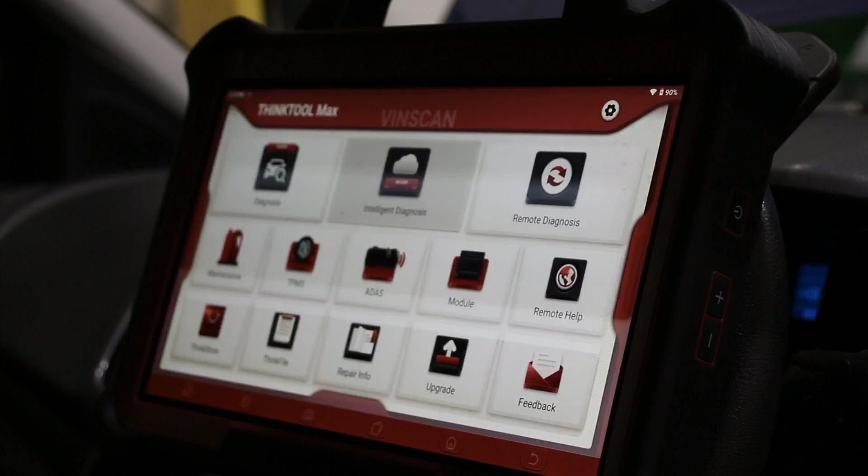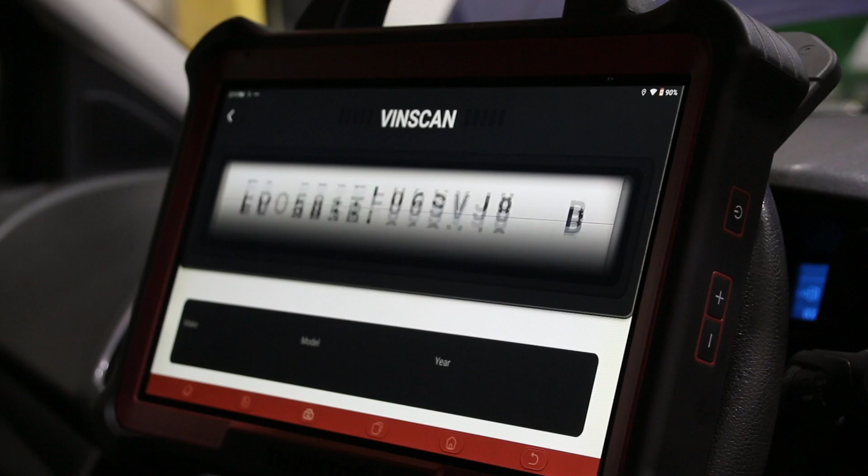So first of all, let's confirm the customer complaint. So we've got the diagnostic tool hooked up. We'll turn the ignition on and we'll scan the car. It'll auto ID this van by VIN number. There we go. And there we have the topology of the car. So we do a smart scan. Got a medium speed network and a high speed network on this vehicle. The ABS and the body control and the powertrain control module are all on the high speed CAN.

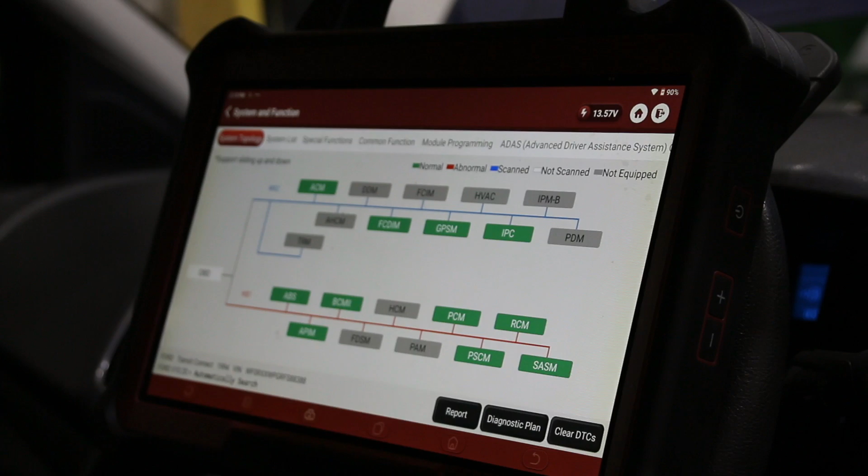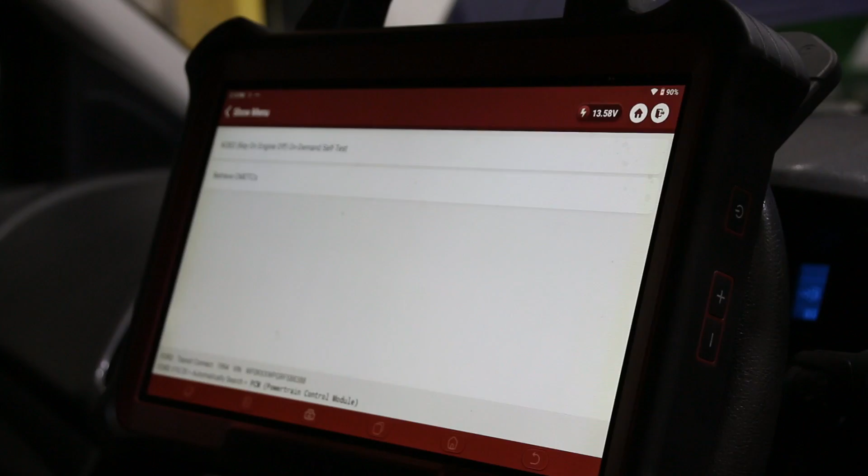On the medium speed will be infotainment, etc. Aircon. Once again, if it shows in green, it's normal. If it shows in red, it's abnormal. If it shows in grey, that module is not fitted. So no faults anywhere in the vehicle. We're going to go straight to the PCM. See, we've already seen there were no faults in it. I'll just prove to you. No DTCs.

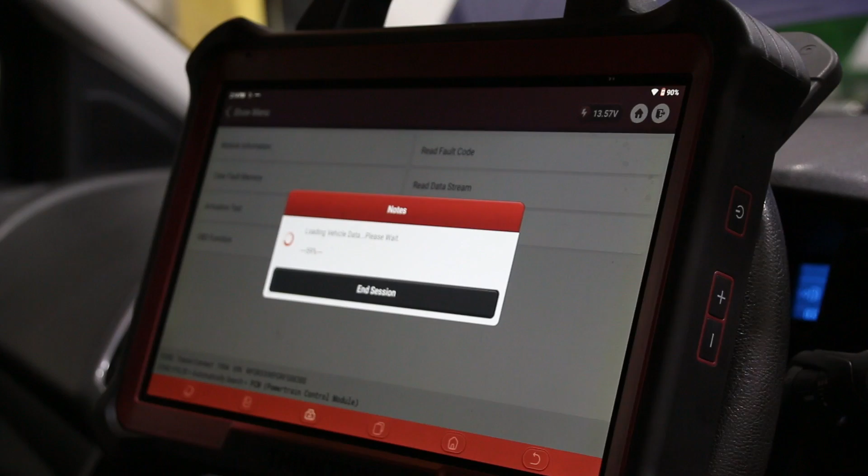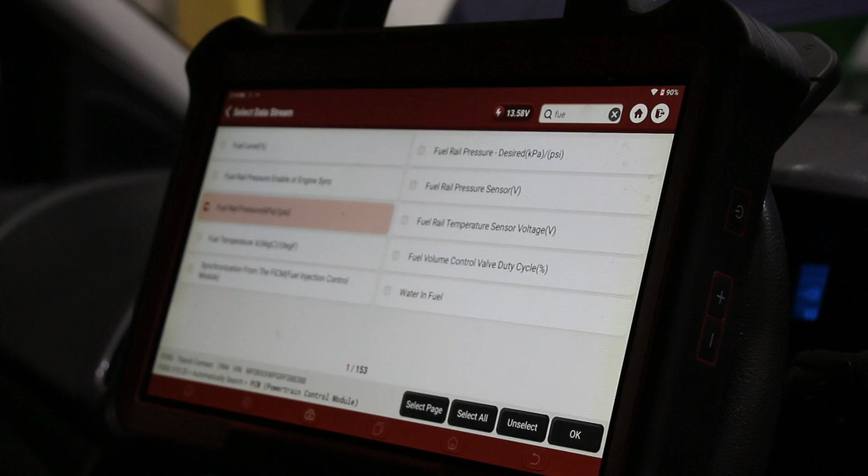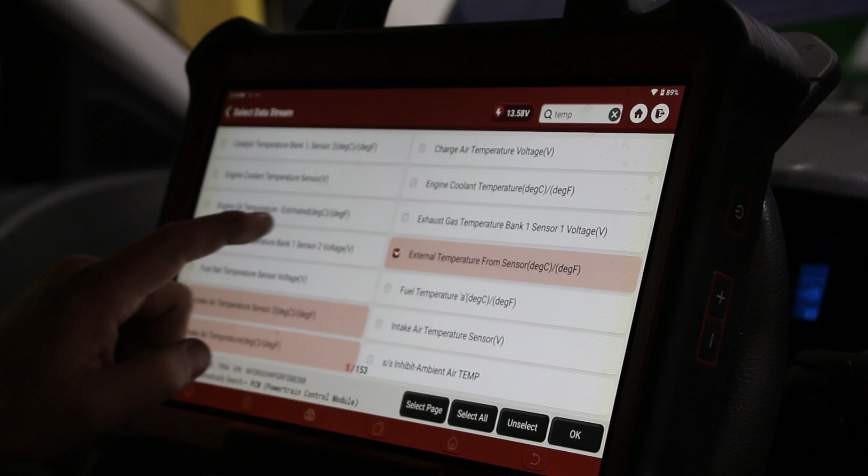We'll go for data. Now with any poor starting vehicle, the first thing I would look at is, does it have fuel pressure? So fuel rail pressure, kPa. Also we'll look for temperatures. So we want the ambient air temperature. We want the air charge temperature. Don't need the catalyst temperature. External temperature. Intake air temp 2. Intake air temp 1. And we're looking for coolant temp as well.

So the air charge temperature is 13 degrees, the ambient air temperature is 12 degrees, the engine coolant temperature is 12 degrees, the external temperature is 12 degrees, which is the same as the ambient. Intake air temperature 2, which is part of the boost pressure sensor, is 13-14 degrees, and the intake air temperature 1, which is part of the mass airflow sensor, is 19 degrees. So could that be where our fault lies?

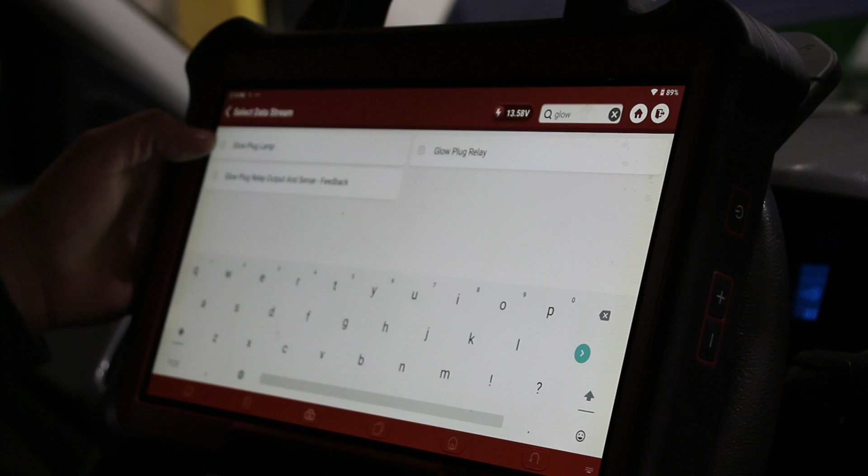I'm now going to also put on the glow plugs. So glow plug, all the glow plug data. At the minute the glow plugs are off, cycle ignition, they stay off. When we crank it, do they stay on? And at this point here, we're going to prove the customer complaint. Glow plugs are coming on, vehicle's still not starting. Try to start there. As you can see, an extended crank time.

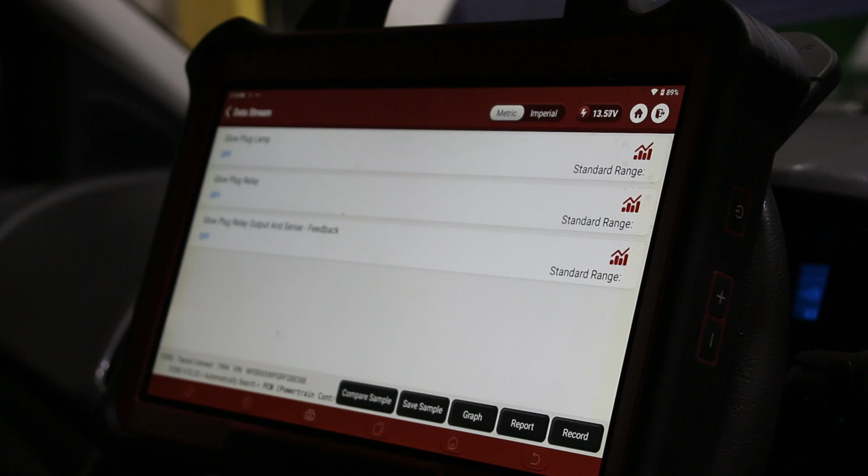Glow plugs were on, but what did we find before was this intake air temperature is sitting higher, considerably higher than the rest of the temps. It's quite cold in here today, so the ambient air temperature 12 degrees, which is probably about right, so we'll use that as a datum. And then every other temperature, the coolant, the air charge temperature, all there or thereabouts. But the intake air temperature in the airflow meter is sitting at 19 degrees. So straight away, we can see there's a possible anomaly there.

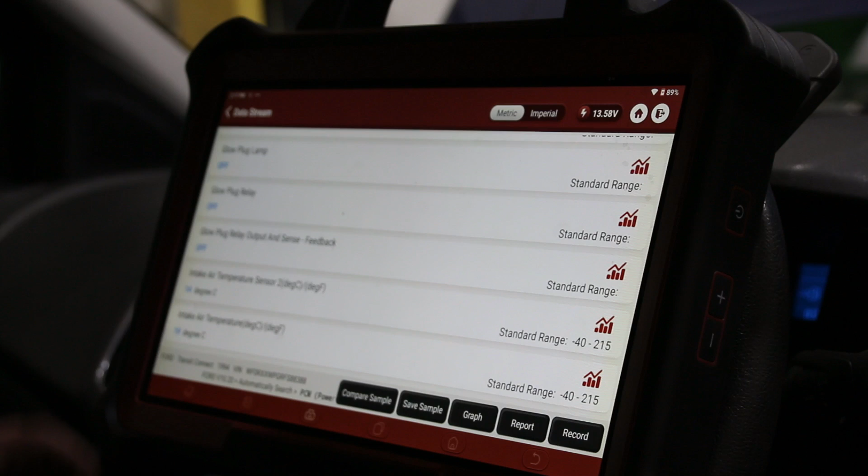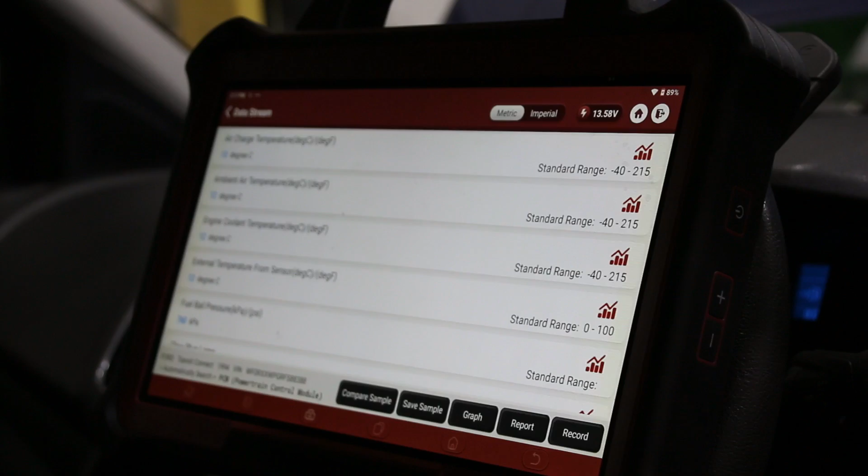Now this vehicle, I'm being told, has had a mass airflow sensor fitted, and the temp sensor is part of the mass airflow sensor. So let's go to the airflow meter, let's take a look at the temp sensor and see if we can bypass that and bring that down to a temperature which comes in line with the ambient air temperature in the workshop today. So we're in under the bonnet. As you can see, the intake air temperature is sitting at 20 degrees there now.

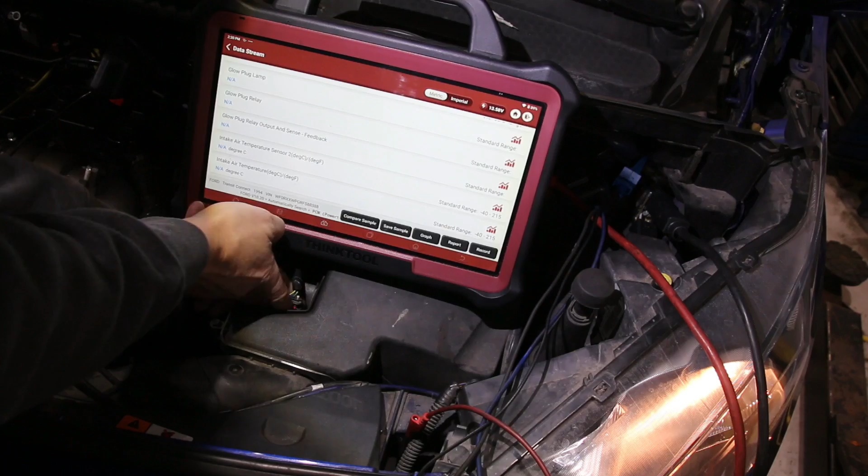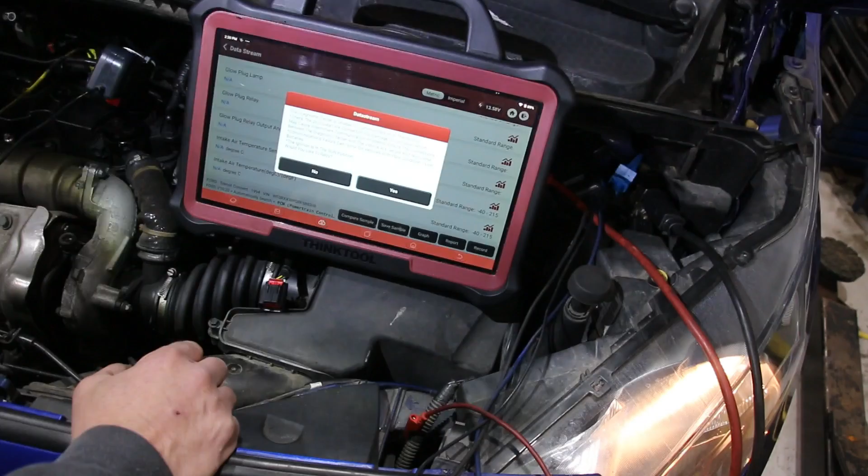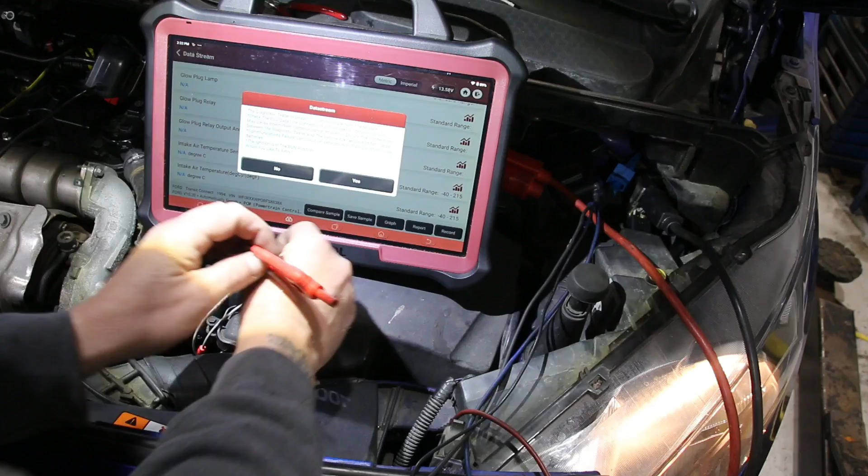So I'm just going to unplug the airflow meter. And what I'm going to do is, I want the airflow meter to still register airflow, but what I want to do is take the intake air temperature sensor out of the circuit. So to do that, I'm going to use these things, breakout leads. One by one, we're going to break into the circuit. So that pin there goes to that pin there. The next one, pin 2, goes to pin 2 on the plug.

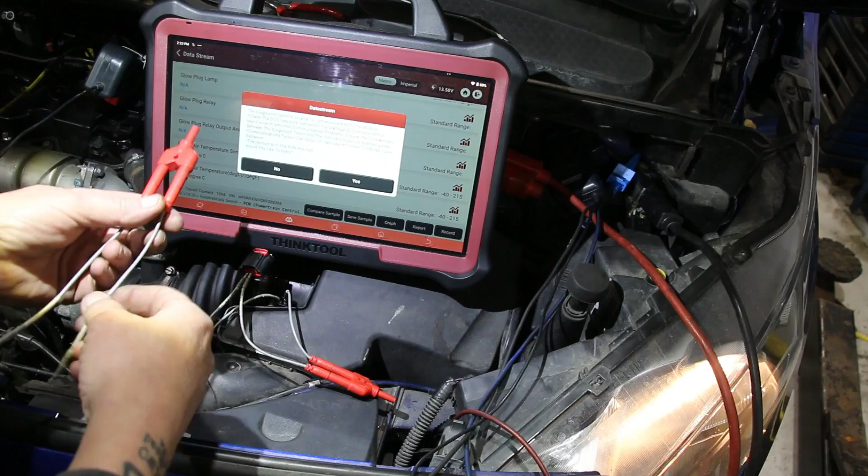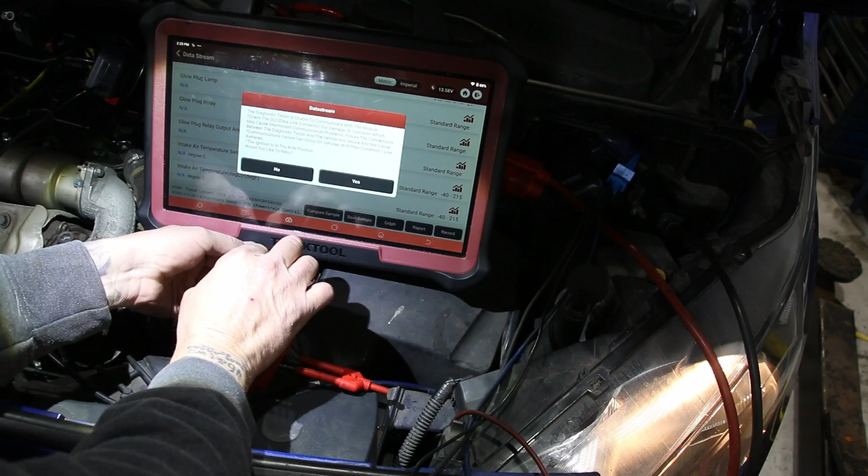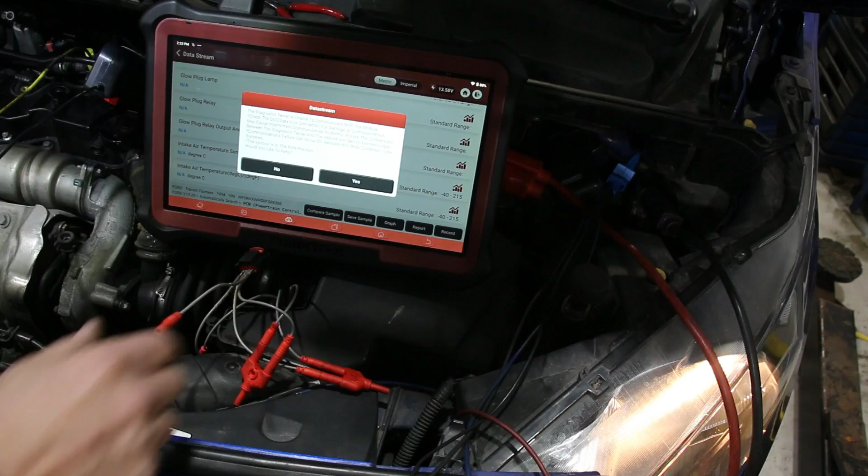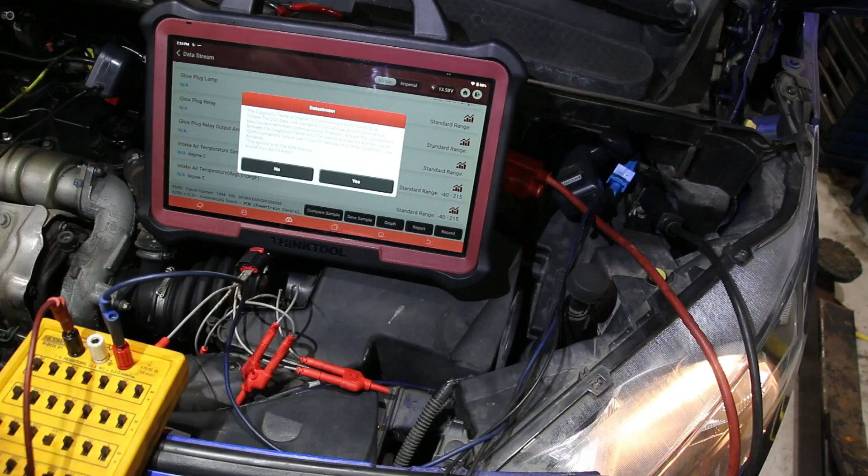I've already checked the wiring diagram for this, and I know that it's the pin to the far right, which is the temperature sensor circuit. So what I'm doing here is I'm keeping the airflow meter in circuit. I'm going to take the temp sensor out of circuit, and I'm going to replace that with a decade box. Got the decade box here. Basically what a decade box is, box full of resistance. So we use this because a temp sensor circuit is just a resistor which is variable depending on temperature. We replace the temp sensor with the decade box, and then we can control the temperature that the ECU sees.

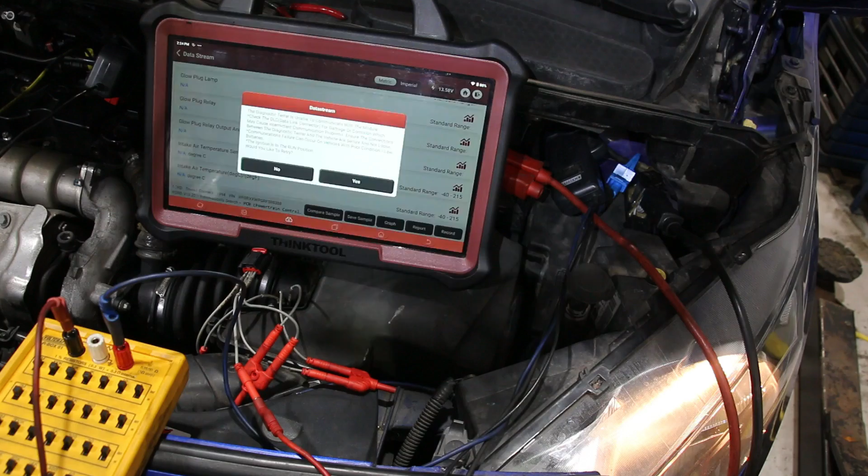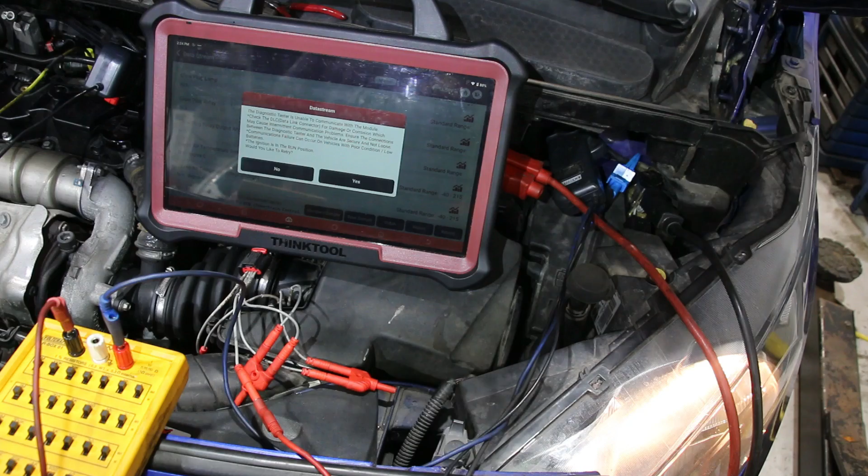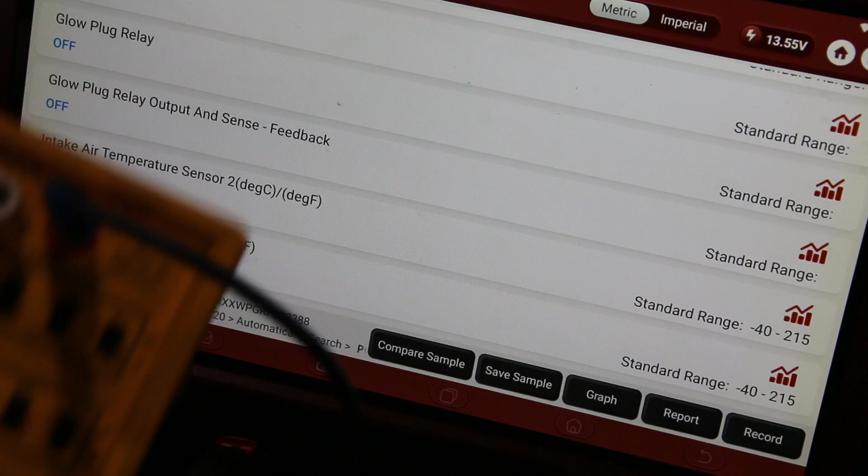So I'm now going to turn the ignition back on, and we'll see on screen as I start changing resistance in the circuit, the temperature on the intake air temperature sensor circuit will start to change. So I'm going to zoom you in on the temperature. Now, as you can see there, it's now sitting at 143 degrees because I've got it out of the circuit. But as I start flicking switches, you'll see that's starting to change. So there, 81 degrees. So that's with 300 ohms of resistance in the circuit. 3 kilo ohms gives me 14 degrees. We're getting somewhere close.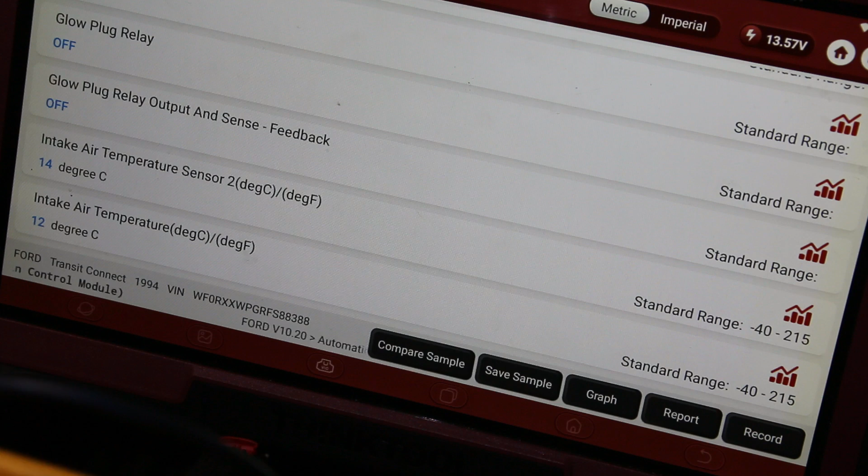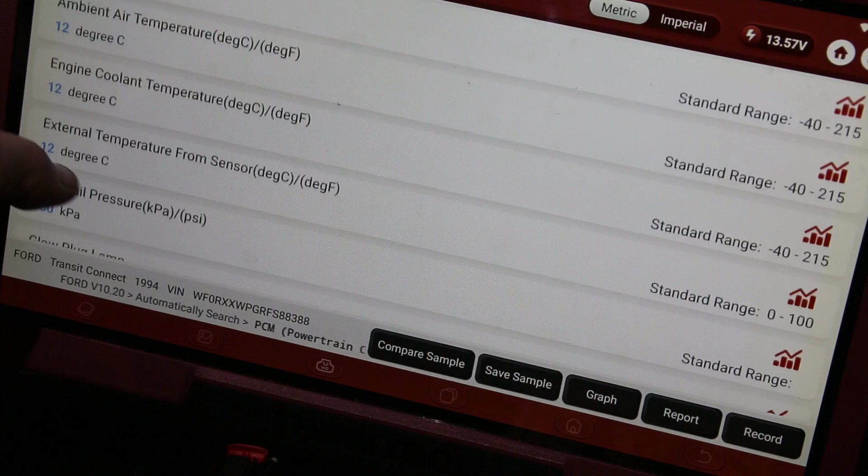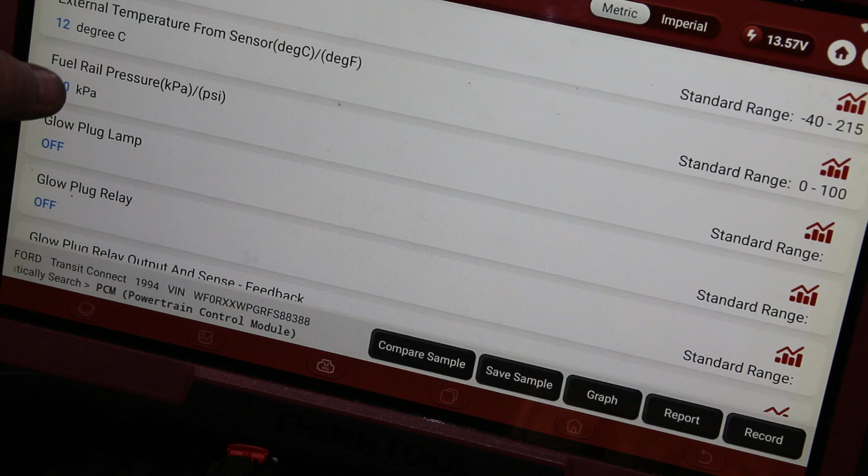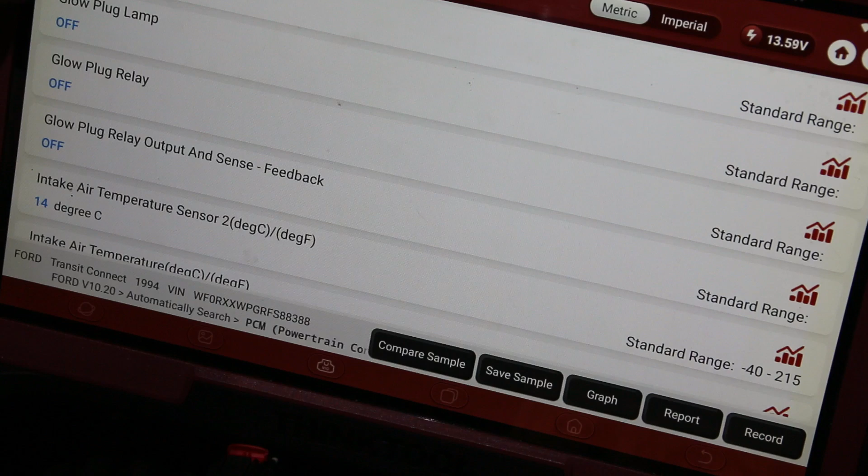We'll start adding a bit more resistance. That's 3,200 ohms. Not quite enough yet. There we go. 3,300 ohms will give me a temperature reading of 12 degrees, which then comes in line with the ambient air temperature. So let's see if it'll start. What I also want you to look at is the fuel pressure here to see if that's rising. When I crank it, that should rise to somewhere in the region of 30,000 kPa, and also as well we should see glow plug control. So we'll leave the fuel pressure at the top of the screen. We should see glow plug control starting to come in as well.

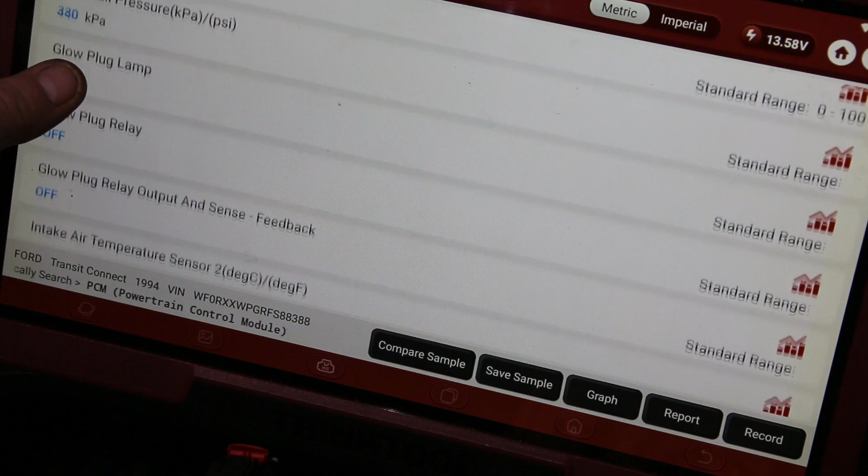As you can see, still doesn't start with the intake air temperature sensor bypassed to give a true value of the temperature within this workshop now. The fuel pressure, I think you would have seen rising to above 30,000 kPa as well, so we're happy that we've got sufficient fuel pressure to allow this engine to start.

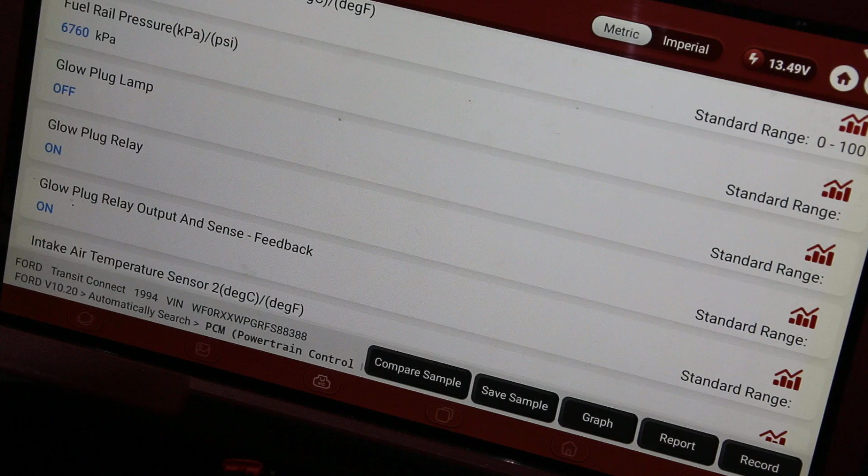Now what we could do now is we could go around individually and test the fuel pressure. Has it got enough fuel pressure? Are the glow plugs, even though they're being commanded on, are they coming on? Blah, blah, blah. Is the timing correlation correct on the engine? But there's one simple way to do all these tests in one hit, and it's using an oscilloscope. So what I've got is I've got 3 channels hooked up at the minute. I've got a low amps clamp on an injector.

I'm back probed into a glow plug to see if the glow plugs are being commanded on. And I've got a high amps clamp on the negative cable of the battery as well. Now, when I crank this engine, I'm going to get a relative compression test of the engine from the high amps clamp. I'm going to see on the yellow channel if the glow plugs are being commanded, and then also I'm going to see if the injectors have been switched on.

Now, if the injectors have been switched on, that tells me a lot. It tells me I've got sufficient engine speed. The engine speed must be above 250 RPM. I've got camshaft and crankshaft sensor in correlation, so the relationship between the two sensors, the engine ECU, is seen as good. I've got sufficient fuel pressure in the fuel rail, so basically above usually about 20,000 kPa, 200 bar. As long as it sees all of those inputs and it likes those inputs, it will then switch on the injectors.

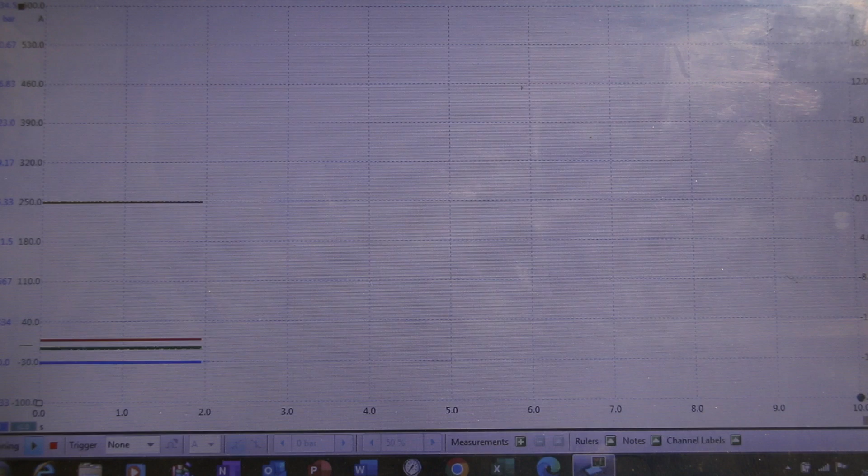I want you to ignore the blue channel because that's not being used at the minute. The gold yellow channel, channel D, is the glow plug command. The red channel is the injector, and the green channel is the starter motor amperage. So on the green channel we should see a sawtooth. On the red channel we should see the injector switching on, and on the gold channel, the yellow channel, we should see the glow plugs being switched on. So I'm going to go and crank the engine and see what we get.

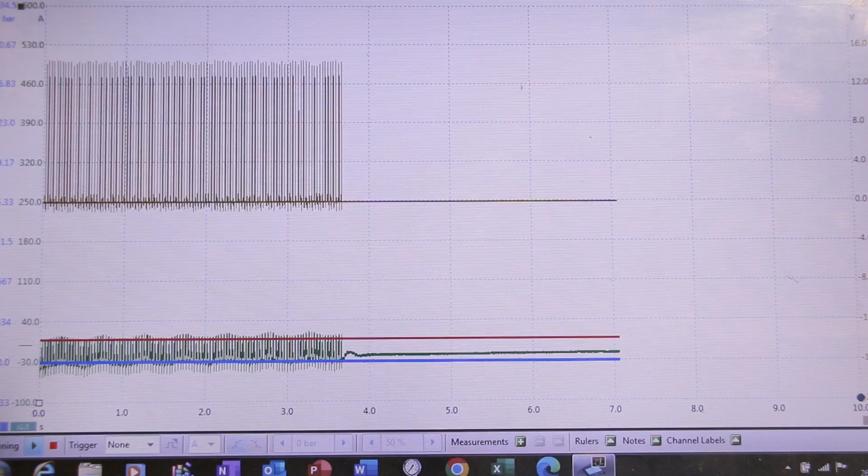Cranked it there just until it tried to start. So we'll stop the scope and we'll go back. Straight away I can see in the red channel injectors are being switched on. So after one revolution of the engine, because there's 1, 2, 3, 4 compression events, the injectors are starting to be switched on. On the gold channel I'm seeing there's activity on these glow plugs, so I'm going to zoom in a bit further just so we get a better look at one complete revolution of the crankshaft.

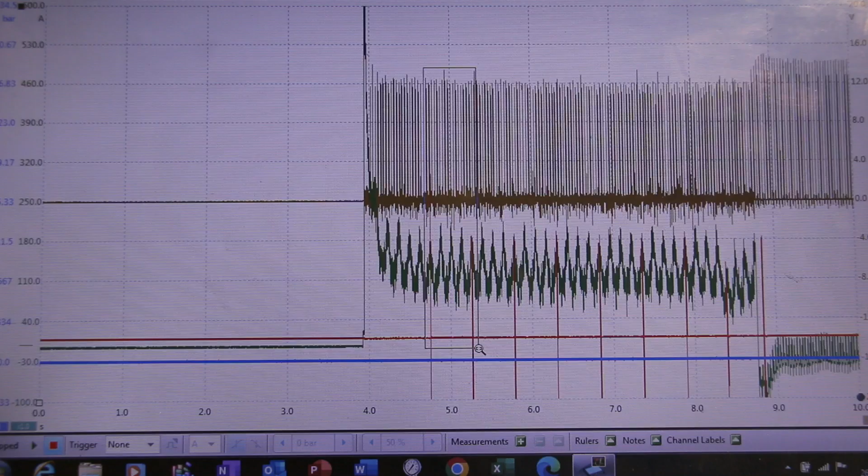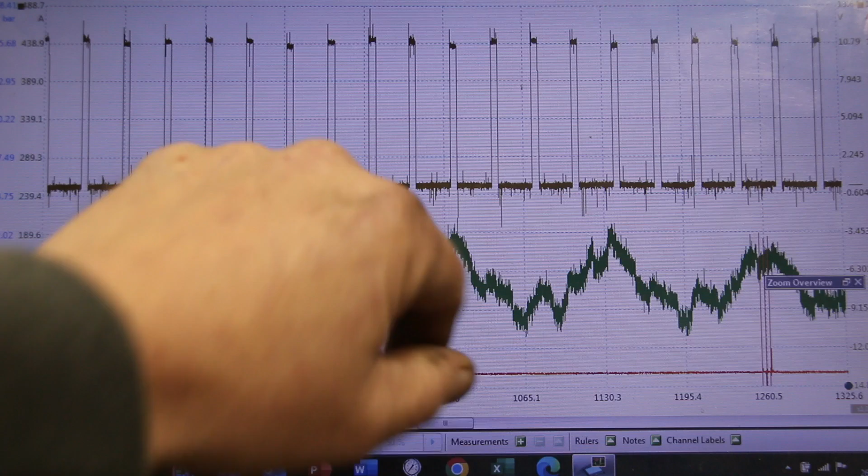So we have the injector being switched on here and the injector being switched on here. So 1, 2, 3, 4 compression events, and then we're back to the first one. And as you can see, the glow plugs are being switched on because we see the switch on the glow plug circuit. So the engine ECU on the diagnostic tool is telling me that the glow plugs are being switched on, and that proves to me that there's actually power getting to those glow plugs. So I'm happy that the glow plugs are being switched on.

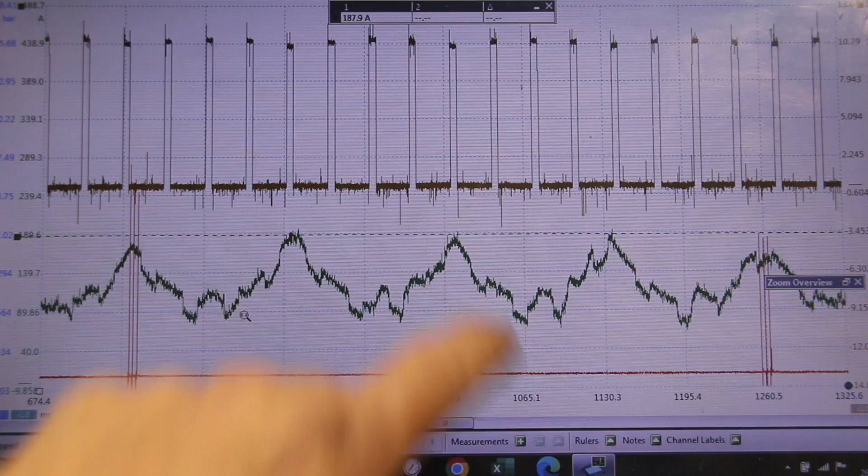So if we look at the compression, relative compression, I'm just going to tidy that up a bit. The dropouts you see in this, if you look, are in line with the glow plugs. It's basically the glow plug current interfering with the starter current. And as you can see, the compressions, that one's a tad lower. Them three are about the same, and again that's a tad lower. So let's go along and see if the next lot of events are the same. So that's the next full rotation of the engine.

It's there or thereabouts. So we've got a cranking amperage of 187 amps. Now, as a rule of thumb, I like to see a cranking amperage of about 3 times the battery's amp hour rating. It's a 75 amp hour battery, so 3 times that, that's 225. It's a little bit low, so has this engine got a compression issue? Possibility. The injector we're tied into is the second injector away from the transmission, which I believe on this engine will be injector number 2.

So if that's cylinder 2, the firing order is 1342, so that's going to be 1, 3, 4, and then we're on to number 2 again. So if there is a compression issue, a cylinder with slightly lower compression, it's going to be that cylinder there. So maybe that's something we can put in the memory bank as the diagnosis progresses. But at the minute, I'm seeing glow plugs switched on, I'm seeing injectors switched on.

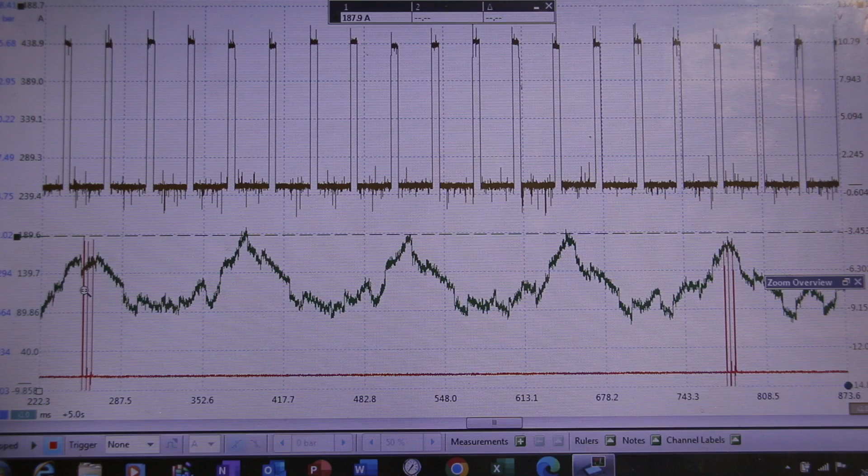Next test, let's check the tailpipe. So I've got the camera pointed at the rear bumper of the van now. Tailpipe's on the passenger side. I'm now going to crank the engine and see if we can see any smoke at the tailpipe. And yes, there was smoke at the tailpipe. So again, conclusively, I'm getting fuel injected into those cylinders.

We're going to have to go a bit deeper now to try and work out why this engine is struggling to start. I think at this point in the diagnosis, the time has come to step back, have a look at the data that we have captured so far, have a cup of tea, and have a think about it. What does this engine need to start?

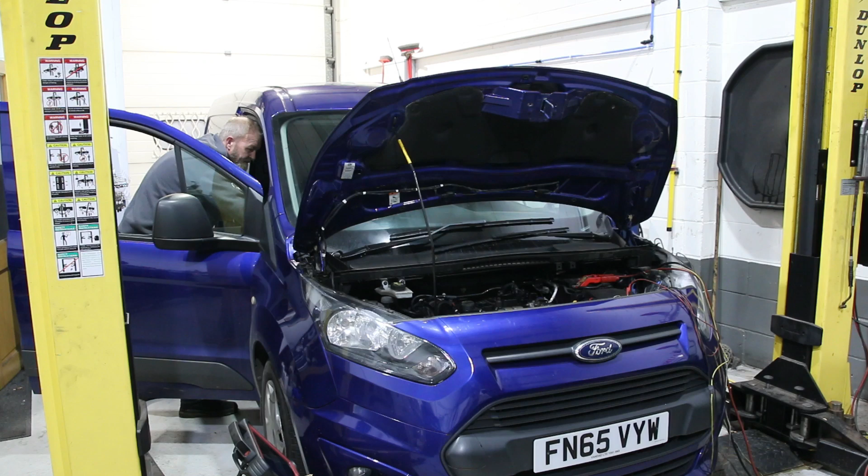So there we go, it's running. I don't know if you can hear it so well, but it's running quite well. It's not misfiring. But what I do notice is, when it is running, to me, it sounds like the engine tone is a bit muted.

Now, the best way I can explain this is, if we go back a couple of generations of diesel engines when we had either rotary or inline pumps with separate fuel pipes for each injector coming directly from the pump, if we retarded the fuel timing the engine noise would sound muted. If we advanced the fuel timing, the engine noise would sound a bit harsher. It sounds like a retarded diesel engine. I might be overthinking this, but it's just what it sounds like to me.

I've been told that once it runs, it actually drives fine. The guy who owns the van has never complained of any lack of power. I don't know if you can see, there's a bit of diesel smoke in the air, I can smell it. So whether that's a result of me just cranking it and there's lots of unburned fuel up the exhaust, or is it just a bit smoky when it's running.

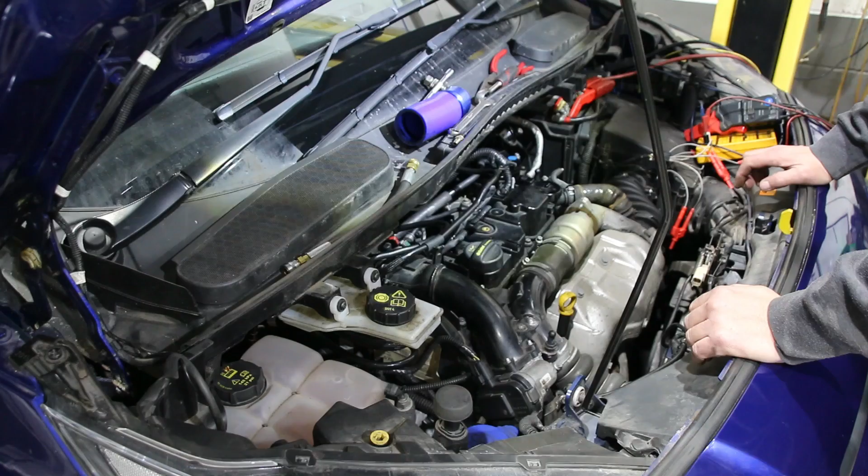Next test, what I'm going to do is I'm going to take a glow plug out and I'm going to go in cylinder and see if I can get any more evidence from the in-cylinder waveform. Now, to get that in-cylinder waveform, I need to remove a glow plug. So that's going to be the next thing. The glow plugs are stuck down the back of the engine, just next to the injectors. So I'm just going to remove one of the glow plugs.

There's an art to getting these out. Got my socket on it now. There we go, one glow plug removed. And I'm going to replace the glow plug with this adapter, which is out of a compression test kit.

If I could find the hole, make your own jokes up about that one.

We'll then attach this pipe to it, which is an AST to WPS adapter pipe. I've got my WPS pressure sensor, which I'm then going to attach to the end of that pipe. But first, before I do anything, I'm going to unplug all of the injectors, because what I don't want is this engine to start while I've got my WPS plumbed into it, because it will blow it to bits.

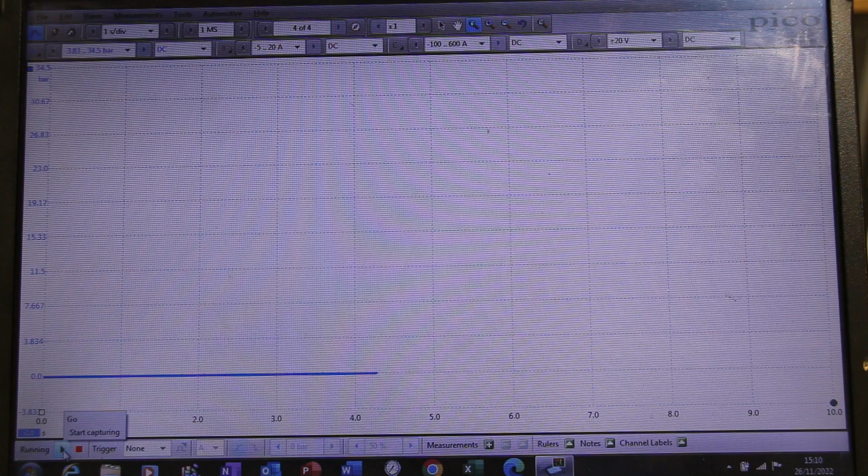So the injectors are unplugged, and we'll now connect that up to the oscilloscope, give it a crank, and we'll see a pressure waveform on the screen. So with only channel A displaying on the scope, because that's where I've got the WPS pressure transducer connected, I'm going to switch the transducer on, and you should see it go through its zeroing sequence on the screen. There we go. So that's basically zeroed it. So I'm now going to crank this engine, and we should start seeing a waveform appear.

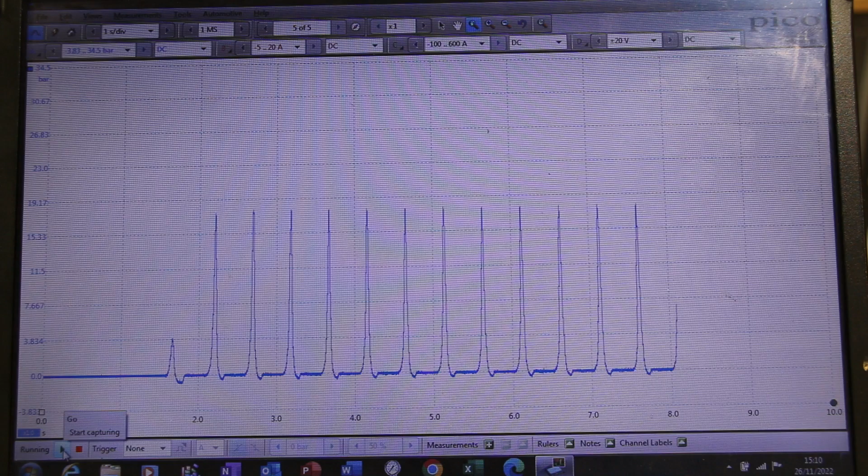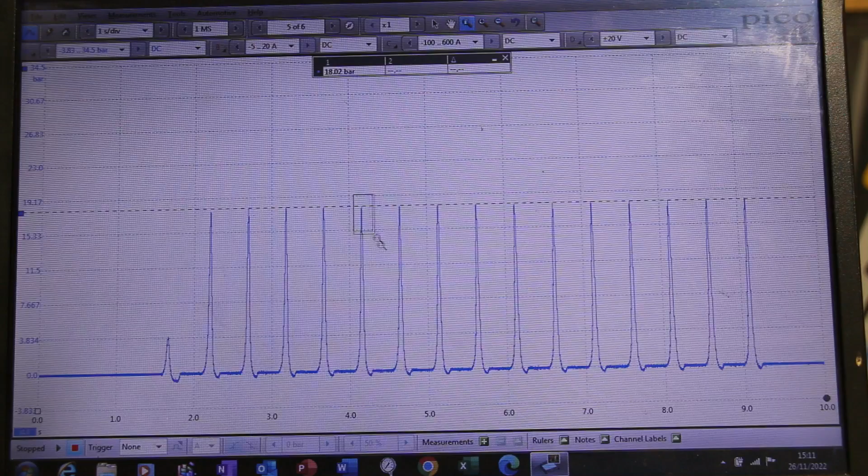There we go. We'll dissect this a bit. So first of all, I'm going to measure the compression. 18 bar. Not great for a diesel engine. I would expect to see in excess of 20 bar of pressure. So that's the first thing we see. I'm going to zoom in on an event which is midway through the cranking sequence. So I'm going to zoom into there, and now I'm going to chop this into 4, which is going to show me the 4 strokes of the engine within that cylinder.

There we go. So just to explain, if anybody doesn't know what we're looking at here, these are the compression towers. So between here and here, we have 720 degrees of crank rotation. So that's 2 rotations of the crankshaft, 1 rotation of the camshaft, so 1 full cycle of the engine within that cylinder. So the compression is rising here, so the piston is on its way up. It gets to peak compression.

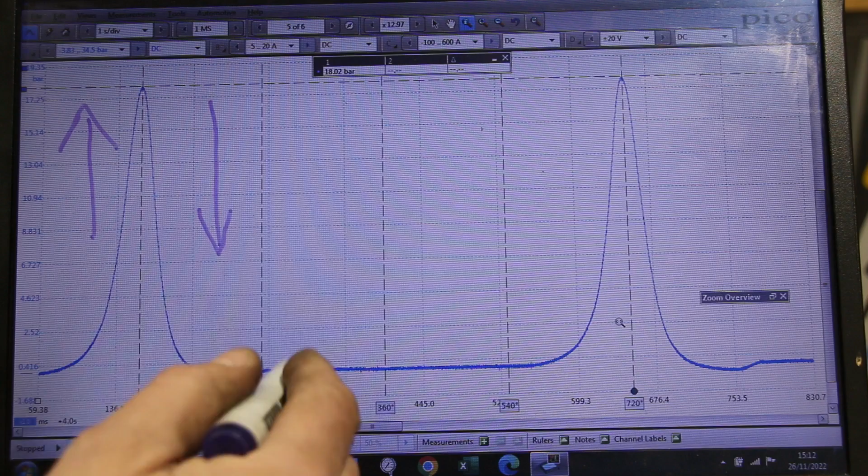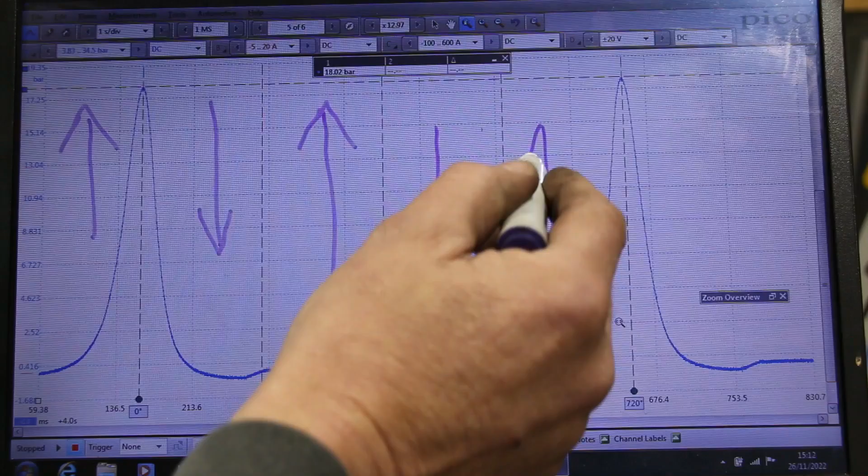The piston changes direction, and this would normally be the power stroke, but as the engine hasn't started, we're going to call this the expansion stroke. The piston is coming down the cylinder, and then we're now at 180 degrees. 180 degrees is bottom dead center. So bottom dead center, and then we're going to start going back up again on an exhaust stroke, and then again back down again on an intake stroke, and then again back up again on a compression stroke.

Now, as you can see, there's a bit of a dip there. What that is, that's what's called expansion. So if we put another line in and we put that to 0, which is to all intents and purposes atmospheric pressure, you can see that line is in line all the way along there because we've got an open intake. The exhaust system is at atmospheric pressure. The intake manifold is at atmospheric pressure.

This dip here is where the piston is coming down and there's still no valves open on that cylinder. So it starts to create negative pressure within the cylinder, or starts to create a vacuum. And we can measure the level of negative pressure by bringing that down there. And we've got minus 477 millibar of negative pressure within the cylinder.

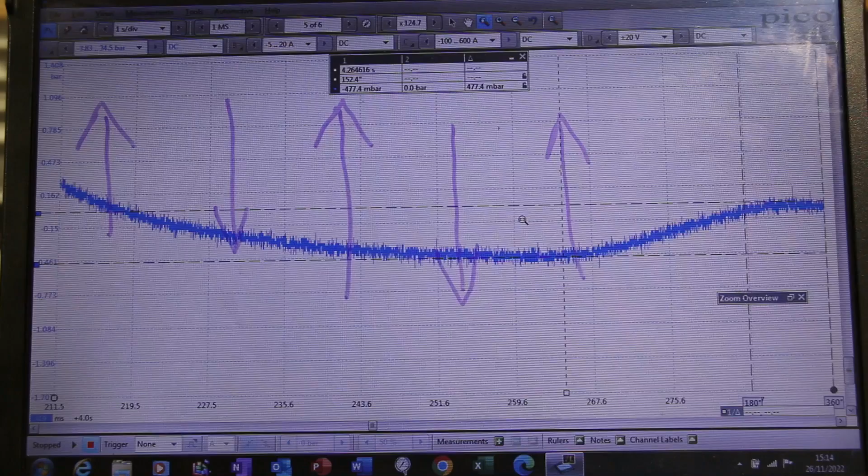Now also what we can do, if we zoom in on there, like so, we can actually look where the pressure starts to change. We can see at that point there, the exhaust valve has opened. So if we set that about there, I'd say, and go back, our exhaust valve is opened at 152.4 degrees, which is 28 degrees before bottom dead center. Is that right? Is that wrong? I don't know. I don't know what the timing of this engine is. I don't know what the timing of the camshaft is.

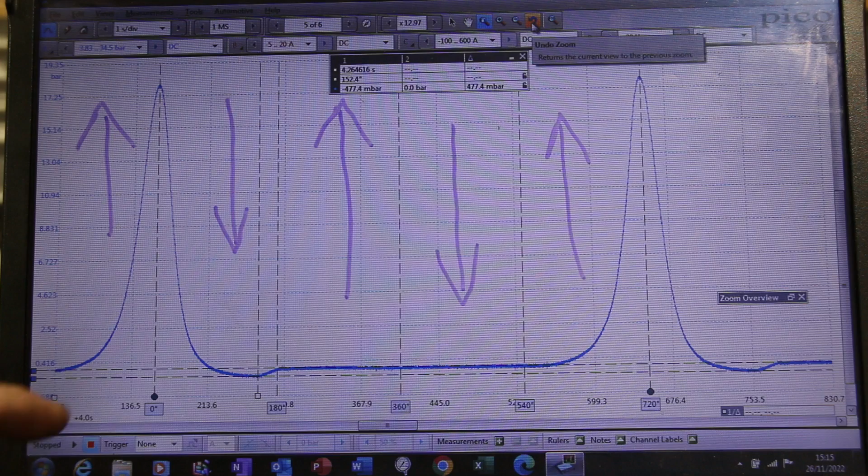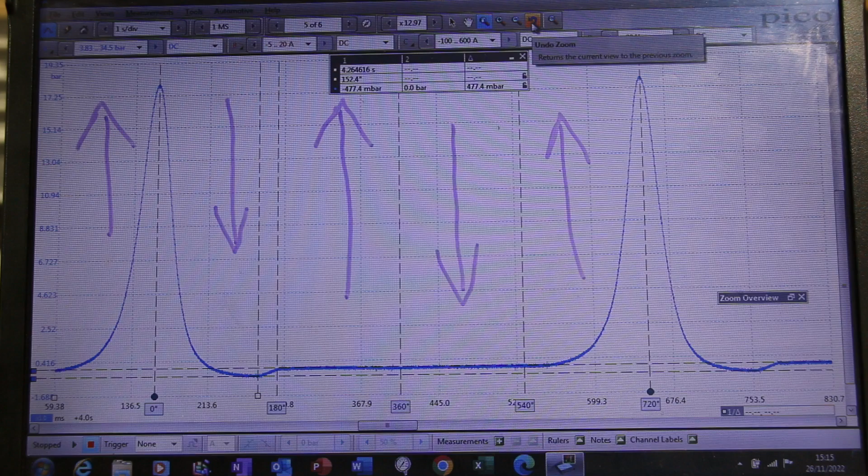Now, what we can't see on this capture is the inlet valve opening. The reason being is it's a diesel engine, so the inlet is always running at atmospheric pressure or above because it's turbocharged. It will very rarely drop below. The only time it will drop below is when the throttle body closes, when the EGR is active. And the exhaust is at atmospheric pressure as well because that's vented to the atmosphere.

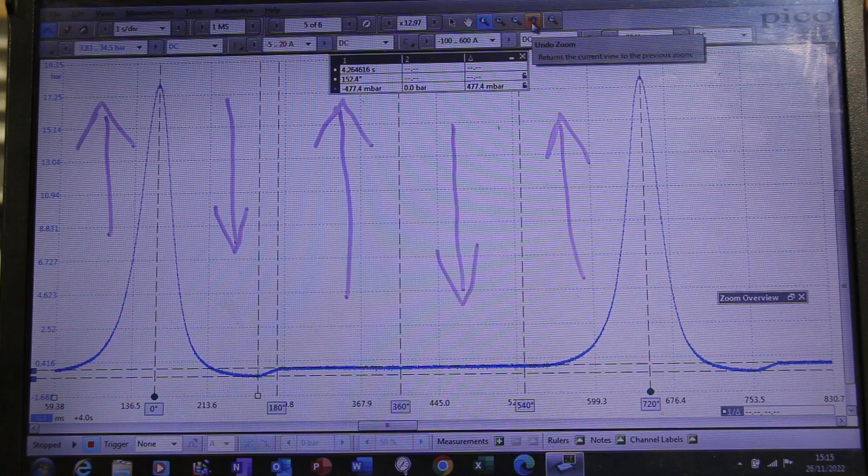So what we're not seeing is any pressure changes around the point where the exhaust valve would close and the inlet valve would open. So it becomes difficult to diagnose what's going on around top dead center under these conditions. But there's a way that we can do this, and I'll show you how. Now we've got that waveform on the screen. To get a bit more definition on that waveform, I'm going to block off the air intake so that I can create negative pressure in the inlet manifold, which will give better definition so I can actually see the valve events occurring.

So first of all, I'll take off the intake pipe on the throttle body, and I'm going to block it with this adapter here from my smoke tester, which I've got blocked off. And I'm going to put that onto the throttle body so that then closes the inlet manifold, stops it drawing any air in from the throttle body, so a vacuum will start to occur within the intake manifold.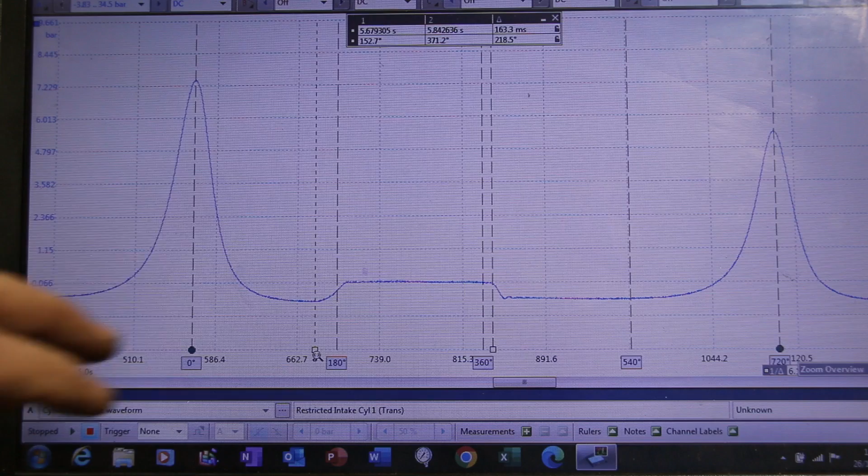So there we are, zoomed in. I've dragged the rulers in. As you can see, where the pressure drops here is where the inlet valve opens, where the pressure rises here is where the exhaust valve opens. So exhaust valve, similar sort of degrees, 150 degrees, 152 degrees. The inlet valve is opening at 371 degrees. So basically 11 degrees after top dead center.

Is that good? Is that bad? I don't know. I would be very surprised if I can get this data off the Ford technical site, because I honestly think in the dealerships they're probably not going to go this far in depth. So I don't know if this information is going to be available.

Easiest way to compare it would be to find another vehicle with this engine and capture an in-cylinder waveform from that other vehicle. And then we can compare what we know is good from a vehicle that starts fine, doesn't have any running issues, with what we've just captured here.

Now, what I've also done is I've taken in-cylinder waveforms from cylinders 2 and 3 as well, which I have stored on file on this computer, and I'm going to show you those as well. I haven't done cylinder 4, the reason being is to get the glow plug out of cylinder 4 would mean quite a bit more dismantling because there's an aluminium casting in the way of that glow plug, and I don't really want to start dismantling components off the engine that I don't need to.

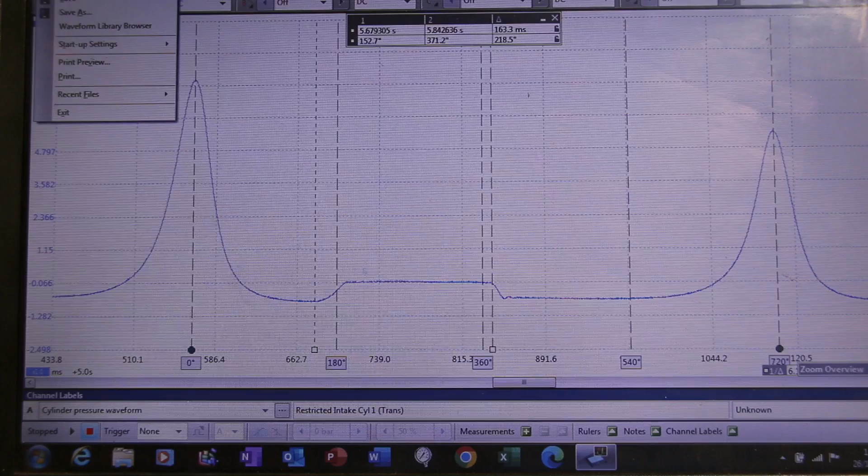What I'm going to do now is I'm going to bring up cylinder 2, which is that one there. And again, same waveform or similar. Our exhaust valve is opening around about 159 degrees before bottom dead center, and our inlet valve is opening 378 degrees, which is 18 degrees after top dead center. And then if I show you cylinder 3,

exhaust valve opens at 155. Inlet valve opens at 373, so that's 13 degrees after top dead center on the exhaust stroke. So there's a variation there, they're not identical, which that in itself basically rings alarm bells. So like I said before, I needed something to compare this with.

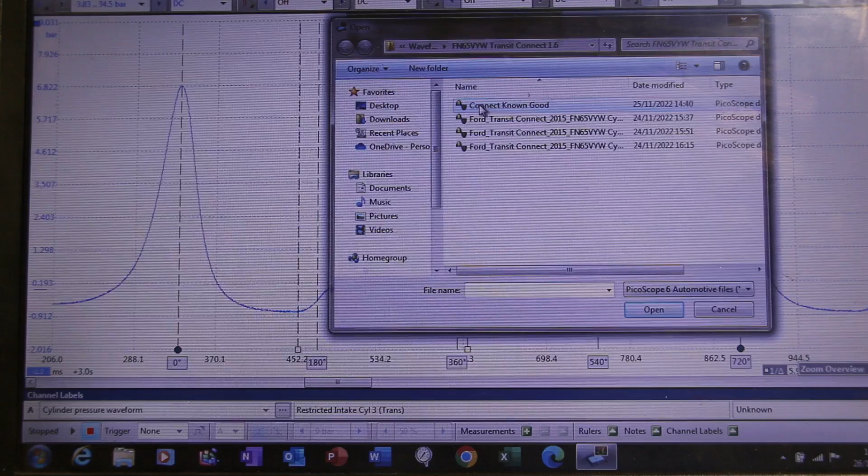One of my neighbours here, 2 doors down, has a Connect van. It's slightly newer, but what I did was I ran the VIN number for this van and the VIN number for his van through PartsLink24, and I looked up the part numbers for the camshafts, and the 2 vans have identical camshafts, have the same part number. So I borrowed his van and I took a capture from his van, which is this one here, Connect Known Good, and straight away hopefully you'll see the difference.

His exhaust valve is opening, I took a capture off one cylinder, is opening at 149 degrees, and his inlet valve is opening at 365 degrees. So his inlet valve is opening at 5 degrees after top dead center, and his exhaust valve is opening, what's that, 30 degrees, 31 degrees before bottom dead center. So there's a difference there.

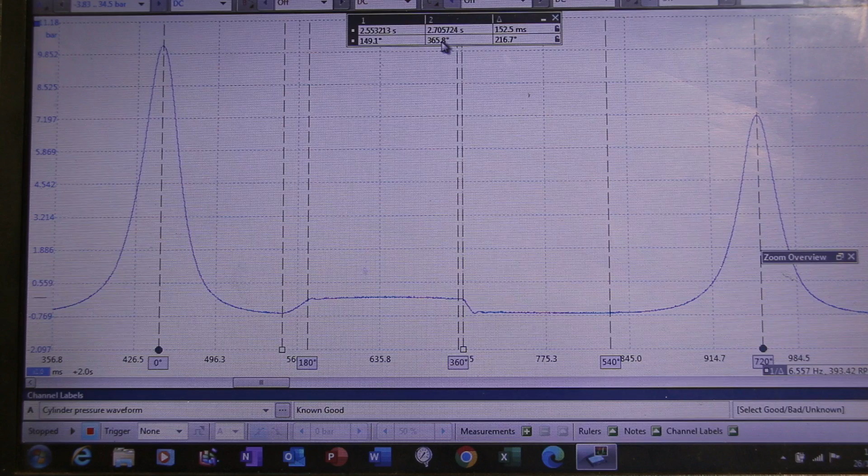Could this be the problem with this van? Is it the fact that the inlet valves are opening late so that it's not getting enough air charge into the cylinder, so when the piston comes up it's not creating enough compression? So there we have it. Still up in the air with this one. I've reported my findings back to the garage that sent the vehicle to me.

Going back over what we've already tested, we know we've got a start permission signal from the engine ECU because we have injectors switching on. We know that we have fuel being injected because we've seen the smoke at the tailpipe when it's not starting. We've done a relative compression test and the cranking amperage was a bit lower than what we expected to see.

We've done an in-cylinder compression test using the WPS with an open air intake, and we've measured the compression on that cylinder, 18.5 bar, which I believe is low. I would expect to see in excess of 20 bar. So based on that, it looks like we have a compression issue with this engine, that's what would give us elongated cranking, bad starts. We've also looked at the valve timing events.

Now, the valve timing events differ on this engine to the known good engine, and also they differ cylinder to cylinder. Now, not one cylinder that I tested came anywhere close to the 5 degrees after top dead center of the known good engine for the inlet valve opening. The best was 11 degrees, I think, and the worst was 18 degrees after top dead center. So what could be causing that?